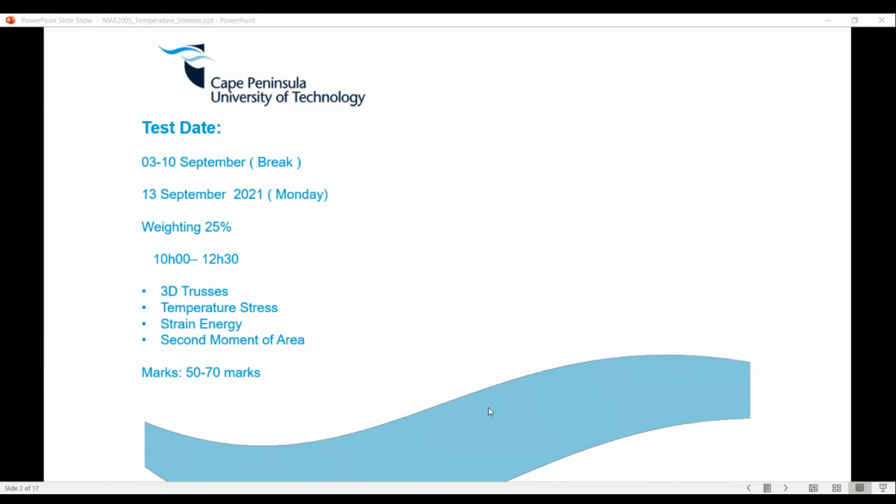But I can assure you, it's a study break, really, because you'll probably be writing electros the next day, and then thermals on the Friday.

So once I conduct all those lectures, I'll consolidate that into a small timetable so that you guys have the dates. The chapters we're covering are for the first four chapters we covered this term: 3D trusses, temperature stresses, which we'll be doing today, strain energy, and second moment of area.

Okay, is there any questions on this so far? Just so that everyone is aware of this.

Yes, Alex. So you're saying we have probably like a week break or something before we... Yep, that's correct. Will we be able to ask you questions during that week break? Yeah, for sure. It's a bit rough for me nowadays because I have like four subjects, man, so I'm probably spending that time setting up the exams. But yeah, you can ask when you can, just that.

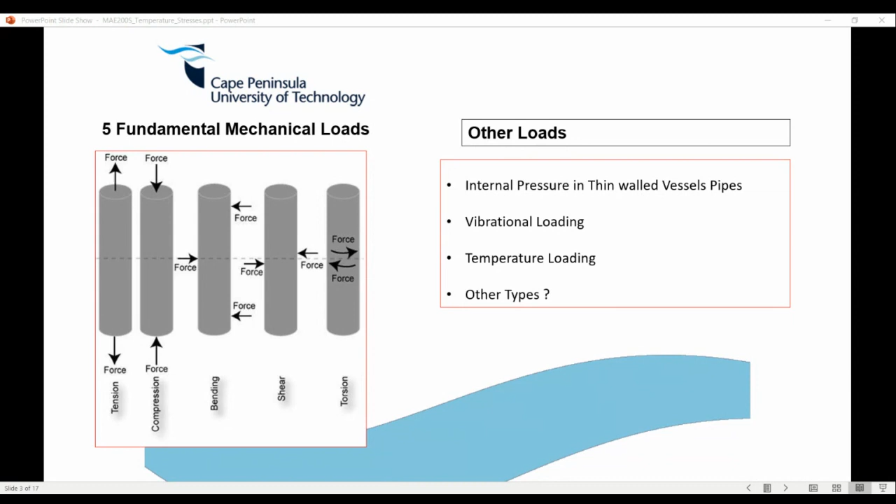So this is what we're kind of looking at. When temperature changes, there's additional stress being induced. It's not a lot - maybe we can tell a quantifying percentage, but we'll see. I'll see how I can play around with it.

Okay, just a formal definition. You're not really expected to know this, but it's always kind of important to note.

Thermal stress may be considered a stress which developed as a result of a non-uniform temperature distribution within the body. Key word, non-uniform, right? If it's uniform, the material has time to adjust, it's not sudden. If it's non-uniform, it's too big, and it can quickly break or rupture.

Examples of this would be parts of an engine, furnaces, metal cutting machines, rolling mills, plastic molding, extrusion, air compressors, hydraulic and pneumatic devices. So that's obviously where we have non-uniform temperature.

So this is now kind of important. As the metal is heated, and this is the notation we will be using, if you heat the metal, it's going to expand, so there's an increase, plus, in elongation.

If it's not restricted, right? So that's also key, that NB there, it's key. Just remember, as we heat it, it will expand if it's not restricted. The dimensions will grow, but then no stress will develop in the material, right?

However, if we have to restrict it, and we're obviously touching on this in the next subsequent slide, if you restrict that, that's when stresses are induced within the material. So keep that small statement in your head throughout the lectures now.

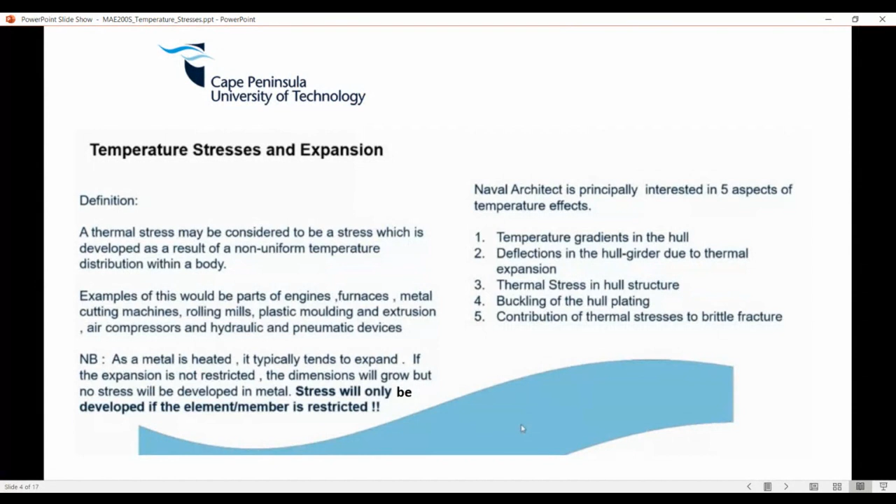Of course, this is more than you need. You guys don't really design structures, but be aware, right? Funny enough it doesn't even talk about temperature stresses because it's a bit small, but of course temperature stresses coupled with fatigue is a whole other game there.

So we're talking about stresses, and this and that. Here we have a new property of materials, it's called the temperature coefficient of materials.

I myself haven't done an experiment on these expansions, so I'm taking the word for it that they are correct. Different materials change dimension at different rates when subjected to temperature changes. Most materials expand with increasing temperature, some even contract, but some virtually stay the same size.

So the coefficient of thermal expansion governs the thermal deformation, or elongation in our case, and thermal stress experienced by a material. This is an important parameter we'll be using, it's denoted alpha. It's the property of the material that indicates the amount of unit change in dimension per unit change in temperature, right?

Lowercase letter alpha, yes. Units aren't a big deal, it's just 1 over degrees Celsius, to the power -1. Am I missing something? But yeah, units aren't really important, you never really touch on the units anyway.

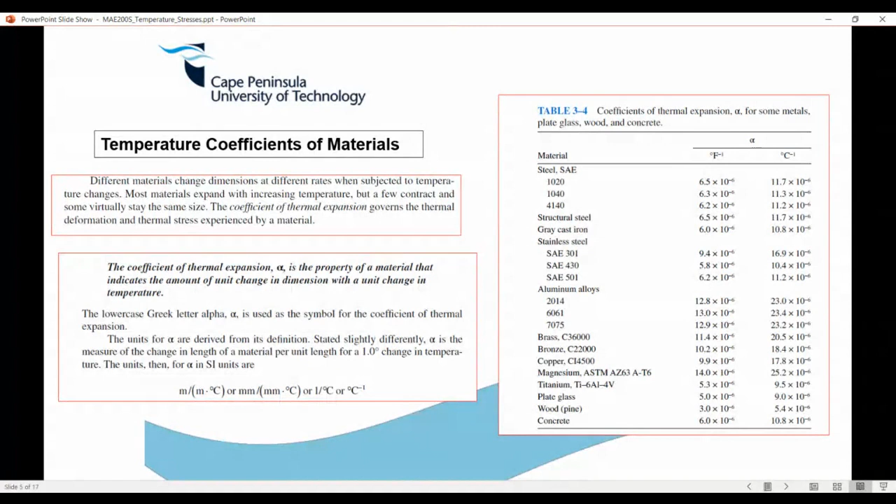If you look at your non-ferrous counterparts, which is aluminium, brass, bronze, copper, magnesium, they typically have higher thermal expansion coefficients than your ferrous metals. Obviously that's probably due to material science, the way the atoms are bonded, and the microstructure. And we look at plate glass, we have around 9. As you can see, compared to steel, wood is around 5.4, concrete 10.8.

Yeah, just a few of them. It's not that you expected to know. I'll tell you why I'm showing all of this.

If you look at some plastics, they obviously have very high coefficients of thermal expansion, reaching magnitudes of around 90 or 95.4 in this table.

And then you get to composites. It's the only thing I find limiting within the current diploma, that we only focus on steels. We can do all the same analysis for other materials, like composites, plastics, and of course biomaterials. We only use steel because it's really the main material we use, steel and all its sub-families, that we do the analysis for.

If you look at the one on your right for composites, composites are anisotropic, meaning the properties differ in different directions. Looking longitudinally, they have a negative thermal coefficient of expansion, like with the aramid epoxy. But if you look at it in the other direction, it behaves completely differently, which is quite interesting.

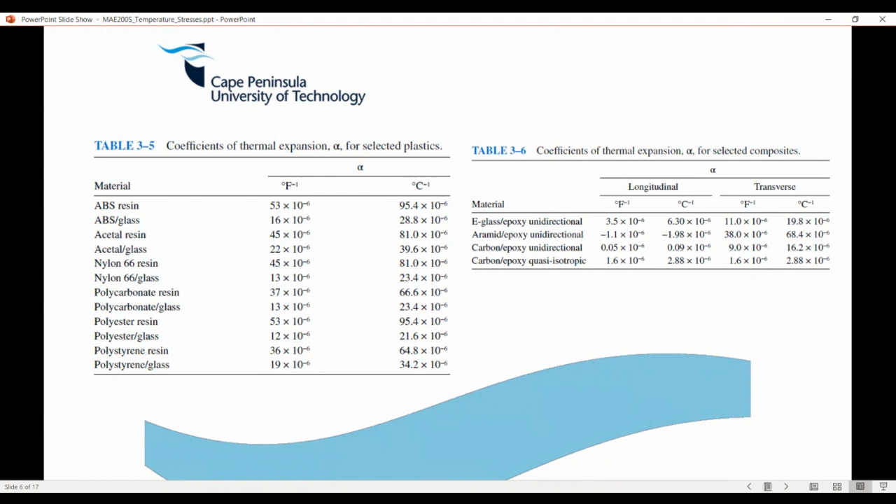Different materials will behave differently, and it's obviously due to the material science below that, the microstructure, the way the atoms are arranged, etc. So let's get into the nuts and bolts.

Back to that note, right? The main important thing to note: if the ends are rigidly fixed, then the change in length due to change in temperature is equal to the change in length due to stress induced in the material. What does that all mean?

The first thing you want to imagine, case A: we've got some bar fixed to something, who knows why, it is what it is. Maybe someone just welded it there. At the original temperature, there's no stress induced, obviously, so we have 25 degrees ambient, nothing's happening.

Let's say the engine starts up and the engine room temperature heats up to 40 degrees. So we're going from 25 to 40. It's not a big gradient, but it's a gradient nevertheless.

So case B is free expansion, meaning we're just allowing the thing to expand. What is it expanding by? Why don't I have the formulas over here? I don't have the basic models which I also wanted to include, just give me a second, I'm having a look here. Yeah, I didn't actually include the models, I thought I had them over here.

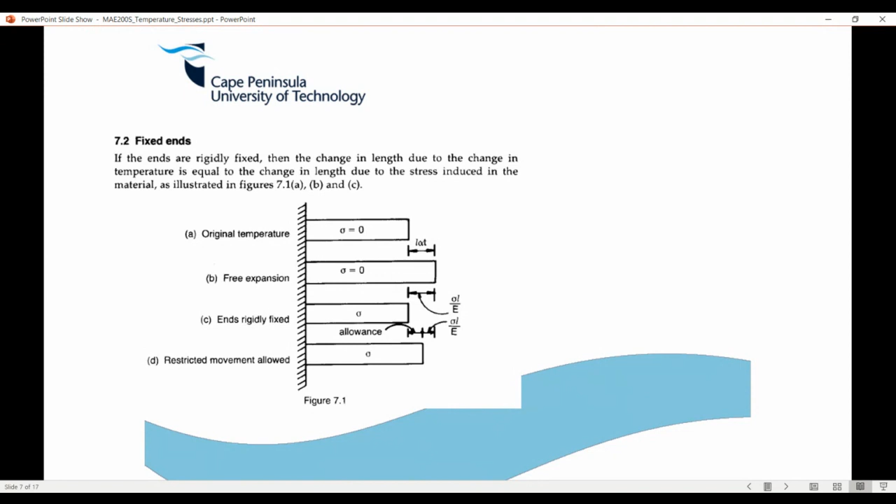Now let's say Alex decides he's going to end up fixing this, having two ends fixed, so think of it as a fixed cantilever. Just want to set up my tablet here to show you what I'm talking about.

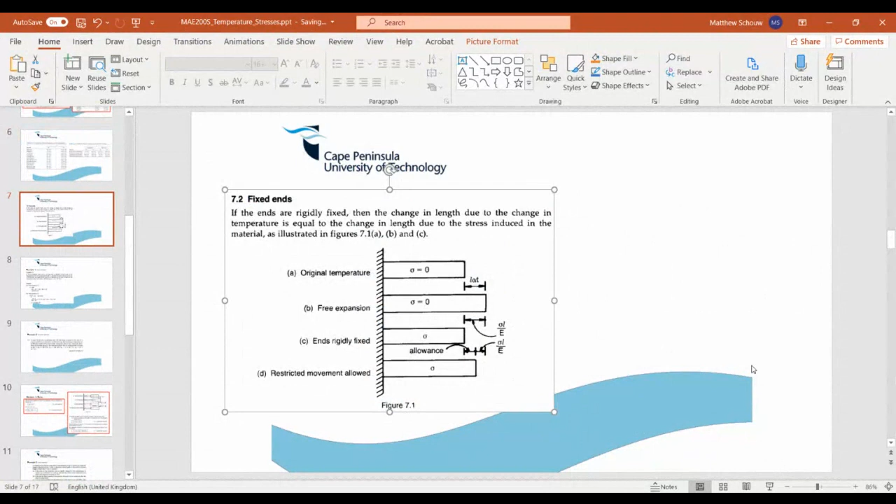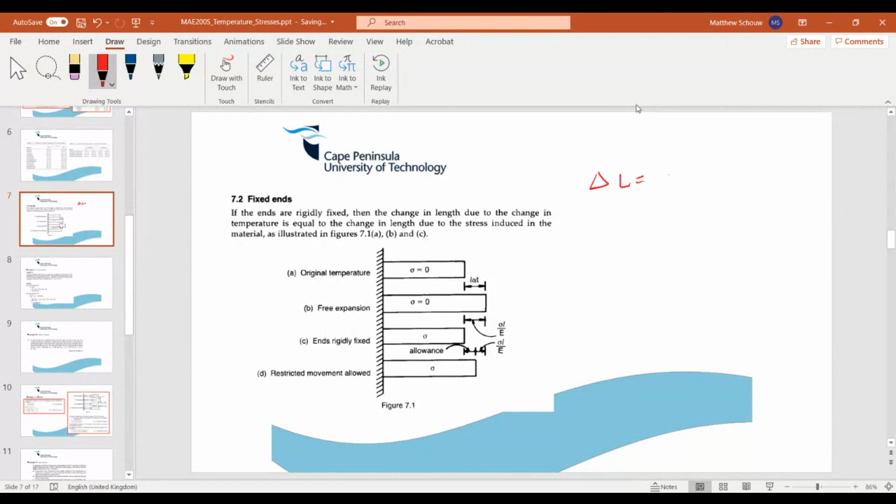I just can't believe I didn't have the model. The model I was referring to is that the change in length we can determine using this formula: alpha L T. If there's an increase or decrease in temperature, that's the formula you use. Your alpha is the coefficient of thermal expansion, L is the length, T is the temperature. Bear with me on that model.

So what I mean is, at the original temperature nothing happens, we're at 25 degrees; in the engine room it's 40 degrees. But now let's say we decide to fix both ends. When I say fixed, we're putting it between two supports like this, like a bolted beam when cast. So if we now increase the temperature from 25 to 40 degrees, there's some kind of gradient, let's say a non-uniform gradient.

This material is going to push against this thing, and of course the wall is going to react. Therefore, a stress is now induced to the magnitude of, essentially, a mechanical stress, sigma L over E.

Okay, so that's for C. I hope everyone gets this. We'll talk about it now. And then on D...

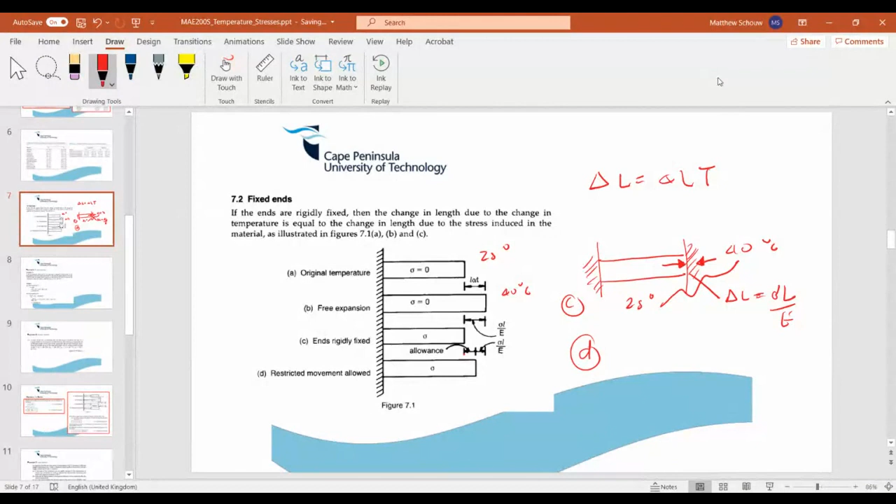Just bear with me. So there's a restricted movement. If we have a bit of an allowance, let's have a look at this - essentially allowance means there's a bit of play in between the thing. So let's look here, ends are fixed. We've got some space for it to extend or elongate, and we're going to have to account for the allowance.

Now I just want to show you, let me copy the models here because it's really bothering me. I'm not sure why this formula is not here. Where are you... here we go.

Yeah, got it. Here we go. Okay, so cut. I'm just going to get it on the slide here. It's essentially what I'm explaining, but I'll just recopy so that it's on here. Not sure why it's not.

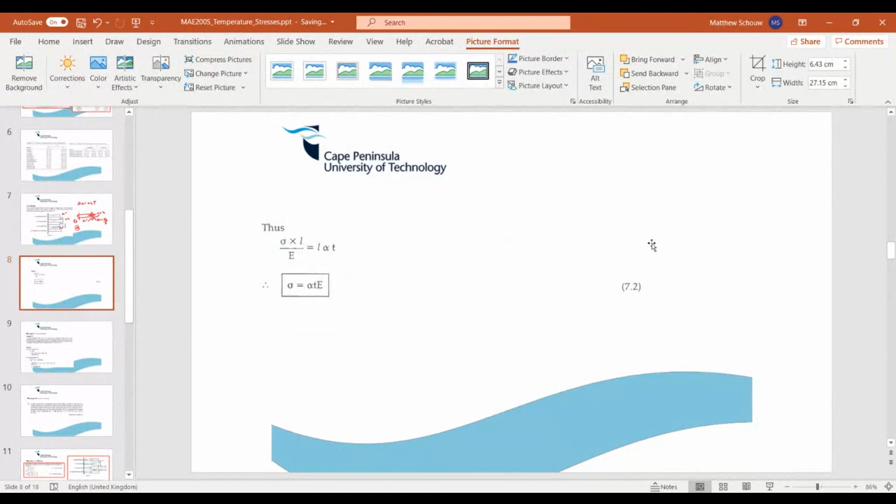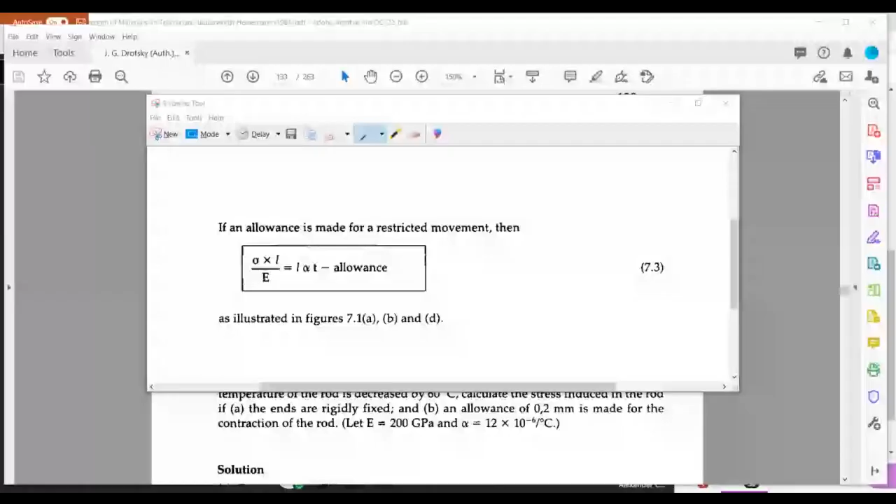So that case, this is the case where it's fixed, right? That's where it's fixed. And lastly, that's if an allowance is made for restricted movement, right? Okay, so that's the two cases which I was highlighting just now shortly.

So if it's fixed, there's going to be a stress induced. And of course, even when you have a bit of an allowance, what we're going to have to do is exactly the same, but we subtract the allowance. So before I move on, is everyone clear when the stress is induced? In this context, of course.

Students, are we all there? Yeah. Okay. Thank you, thanks Sasha. Anyone else?

I hope you understand the idea, because I can make a scenario where the thing extends, but let's say it doesn't extend all the way, and there might not be any stress induced. So just be aware. But anyway, let's have a look.

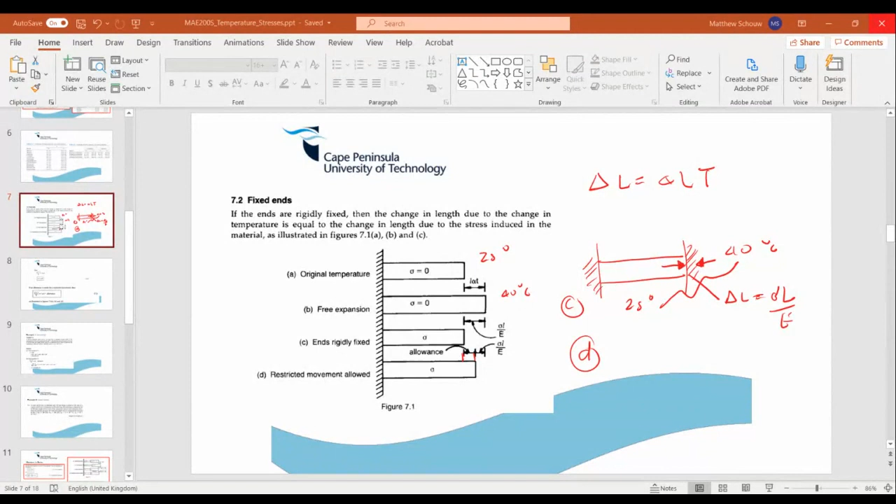So okay, we just have a quick example we're going to touch on here, and then I'm going to give you one practice one. Obviously I want to see if you guys are all there, if you have enough time to cover everything here. So first thing is first.

Yeah, so let me do the example. So, 25, it's your first example from the textbook. I just remember I'm going to play around on this one anyway. A 25mm diameter steel rod.

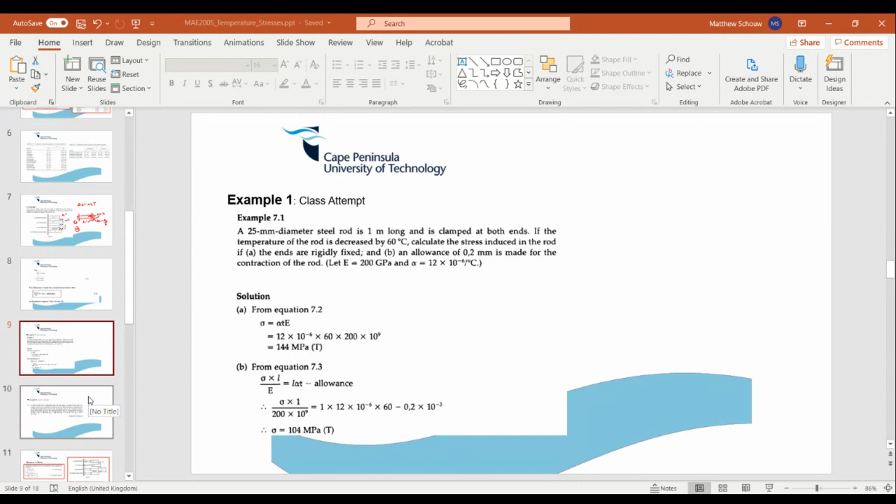Right, so you've got a rod. Let me just create a small rod for you here. Where are your rod? Yeah, it looks like a rod to me. There we go. Steel. Yeah, it's steel now, okay.

It's 1 meter long and it's clamped on both ends. Right, so there we go, so it's fixed. So did it tell you what's going to happen? Right, so this could have been a shaft for crying out loud - maybe some bearing supports or whatever.

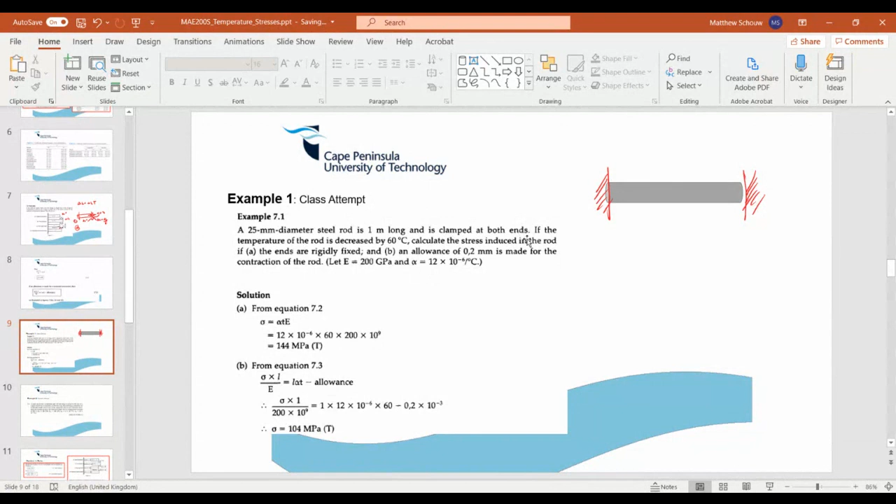And now the temperature is decreased by 60 degrees. Right, so they're telling you, I guess, the gradient here already. Calculate the stress induced if the ends were rigidly fixed.

Okay, so we know change of length - I guess I'm going to call it the mechanical change of length. What did we call it last time? It was mechanical, according to what I called the mechanical change of length, and the thermal.

Stress equals your coefficient of expansion - I'm just going with a T and an E. So if it's fixed, that's what's going to happen in this case example. So if you compute that, it's 12 times 60 times 200, which is your elastic modulus, it's always going to be there, and then 144 tensile.

Why is it tensile? Because it's a reduction in temperature, a reduction. Are we on the same page here?

So if the temperature is reducing, shouldn't it contract? The ends are rigidly fixed, so you're having a tensile force.

Yeah, there we go. Does everyone get that? I'm just checking. Yeah. Okay, yes, no one is going to... so, so I don't get that.

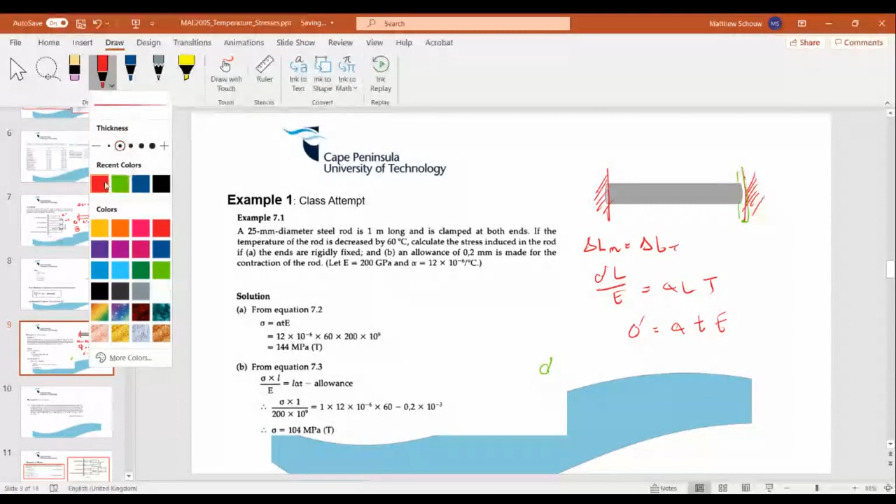Well, we have to use this. Let me just get that right. Stress L over E equals

it's the same, I guess. Basically, it's alpha LT. And of course, because it's a bit of space, it's not the same, so we have to subtract this allowance. I'll just call it A, because there's a bit of room there now. So we're basically essentially moving that. That's just speaking to this figure over here.

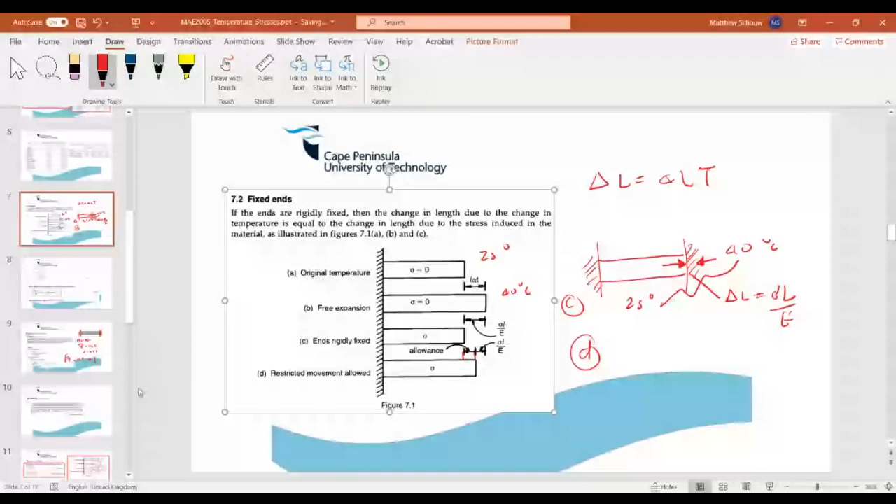The senses are important, we know, and we're going to get to that now, because that's what trips everyone up. So that's just looking at it from a formula-based approach, but we will start touching on and seeing why this is happening.

Okay, so what I want you guys to do now is try and do example 2, which is 7.4 in the textbook. It's basically a steel rod joined to a copper rod. Now this is a series arrangement. I just want to see, as I did this last year, if you guys are able to figure this out.

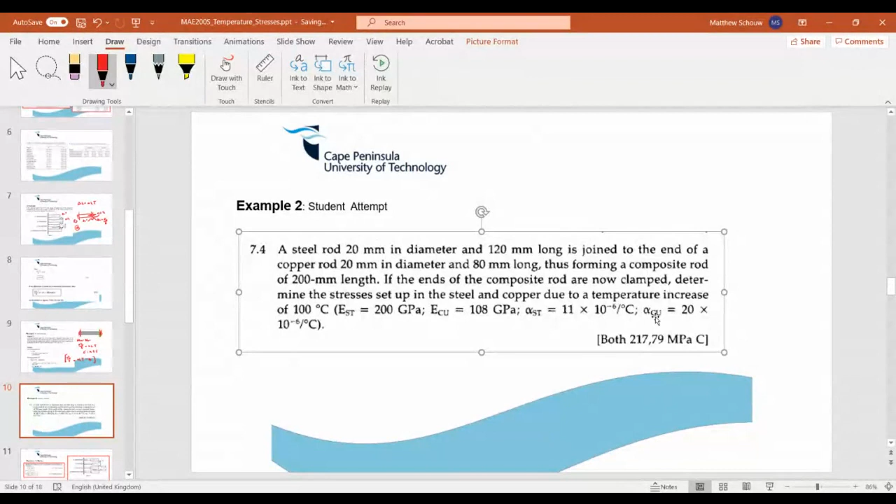So now we have an increasing temperature. What's important is we're really going to start to see the senses playing around with each other. So try and do this one, and then we'll touch on it. I'll solve this one, and then we're going to move on to actual series.

So I'll give you guys around 10 minutes, that should be enough. If you want to get some hints, it's just like I said, a series arrangement. But I'd like to see if you do understand the senses, because that's where I essentially want to get to.

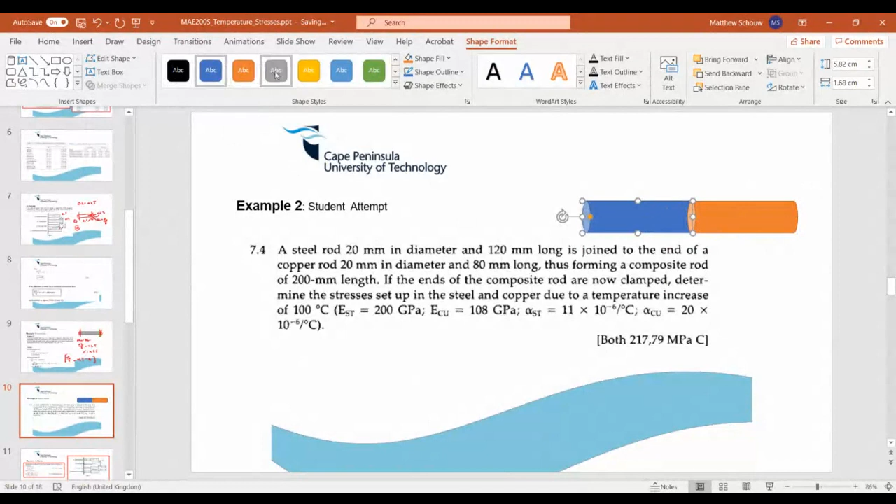Yeah, you've got two shapes, so you've got two rods here. Just see what you can do, right? In this case now, this will give me - obviously just assume that they're both fixed. One is copper, one is steel, I think, and they're both fixed, right?

Now it's going to be very interesting to see, because one is going to be fixed, or one's going to extend faster than the other one. So I want to see exactly if you guys can pick it up.

Okay guys, so around half past we can actually just get back to this problem. So try and do this one. What's important is look at the senses. I want to see if you guys can pick up the senses within this.

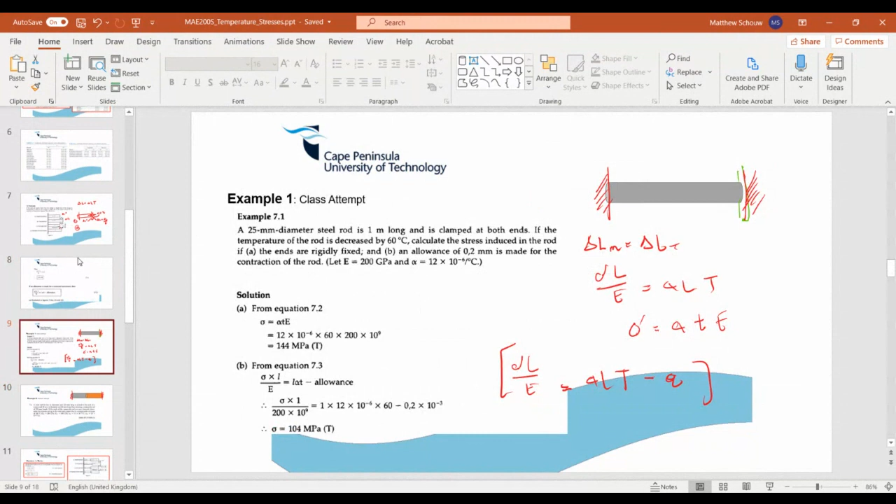Sorry sir, can you just go back to where the formulas were? Yeah, do you have a textbook? Not just yet. Yeah, because these formulas are not gonna particularly help you with this problem, and that's the thing. Those are the formulas, but yeah, someone's gonna have to take a picture of the formulas for you.

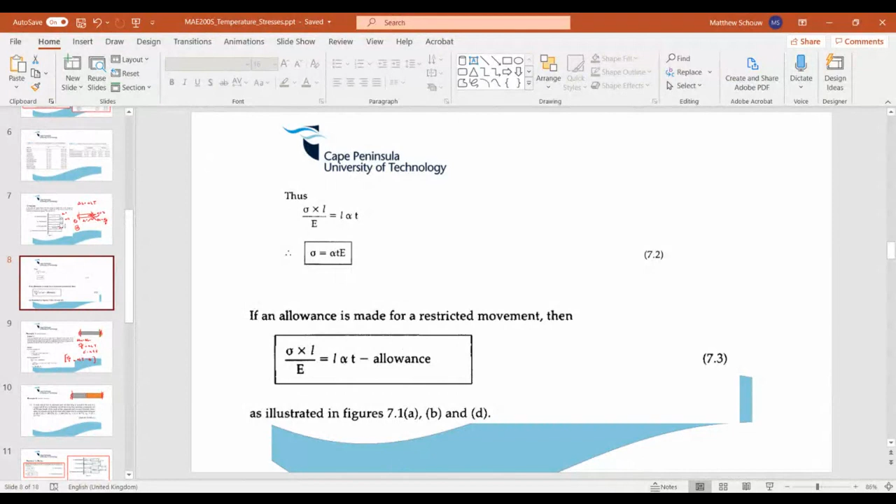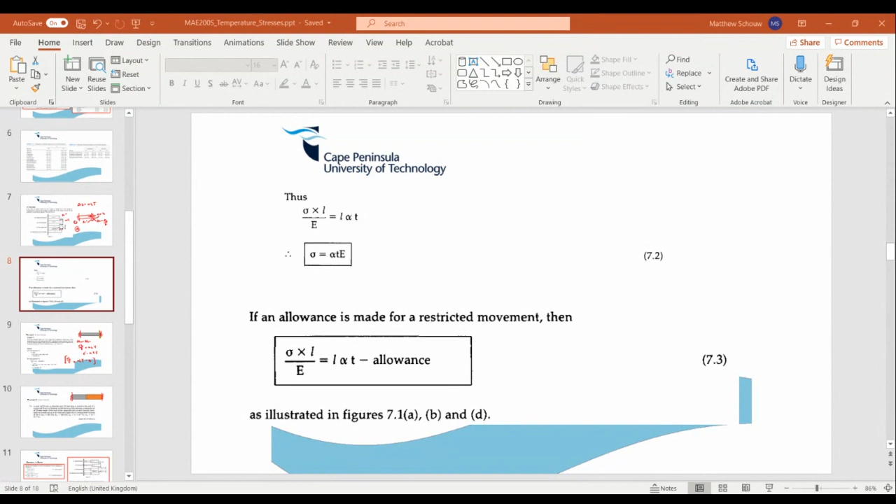Where was I now? There's 2 bars now, so I want to see if you're able to kind of interpret exactly what's gonna happen. Do you have the formulas down there? What example are we doing now? 7.4. Is it done? Are you done? Yes, thank you, okay cool.

So is there a tensile stress in steel and a compressive stress in copper? Now you're talking. It says they're both compression there. But now you're talking.

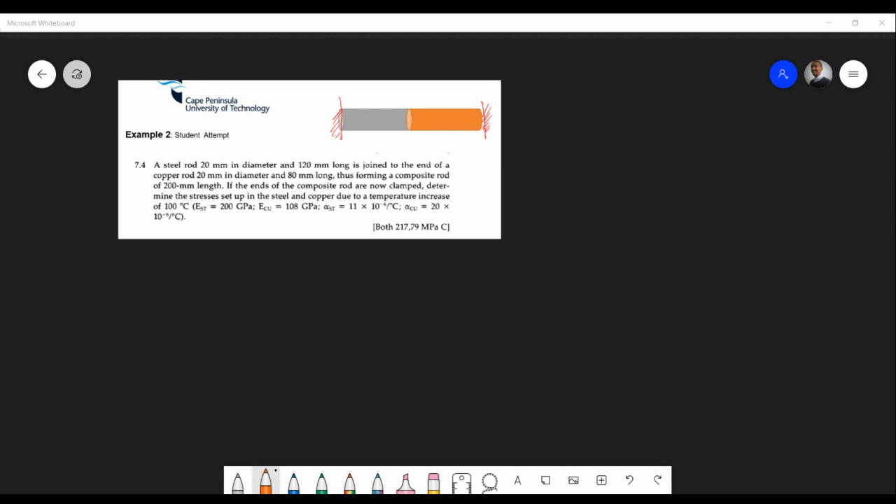All right, where are we here? Where's my whiteboard? Okay, so first thing is first, right? Because it's a series arrangement, I think what I was trying to really pick up here before the senses is that both these materials are going to expand, all right.

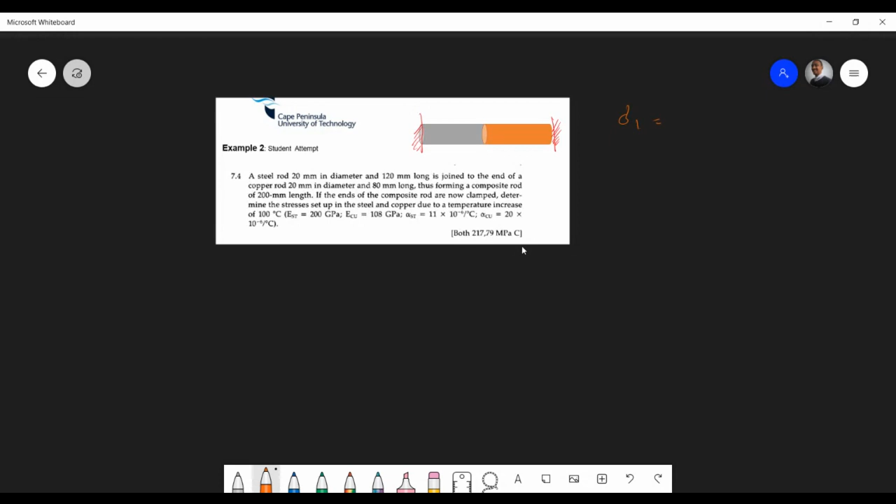So the standard model of our series arrangement looks like this. Let me just get this right here. The forces are the same, right? So the force in the first one is the same as the second one, and therefore we can do this kind of setup over here. Stress 2, right? So this is what I was trying to show.

Then of course, because it's in series, they all have individual changes in length. I think that's what's important here. And then of course L1 plus L2 - this is something you're familiar with. Obviously this is kind of not what you're used to, but in the temperature stress context, this is the way you want to view this. And this total change in length is due to thermal expansion, so you should be aware of that.

So just following the way Sasha did it here - well, I think we all did it the same way, can do it the same way. We have to work out the total change in length of this arrangement here, right?

So steel was 120 long, this was 80 long. Diameter here was 20, and the copper rod was also about 20 diameter here. Yeah, okay, cool, the same area. Yeah, forgot about that, okay cool.

So it's alpha L T steel plus alpha L T copper, so that should get you the total. Steel was normally - well, this is 11 in this case, not 12. Length, what is our length? It's of the individual one, so that's 120.

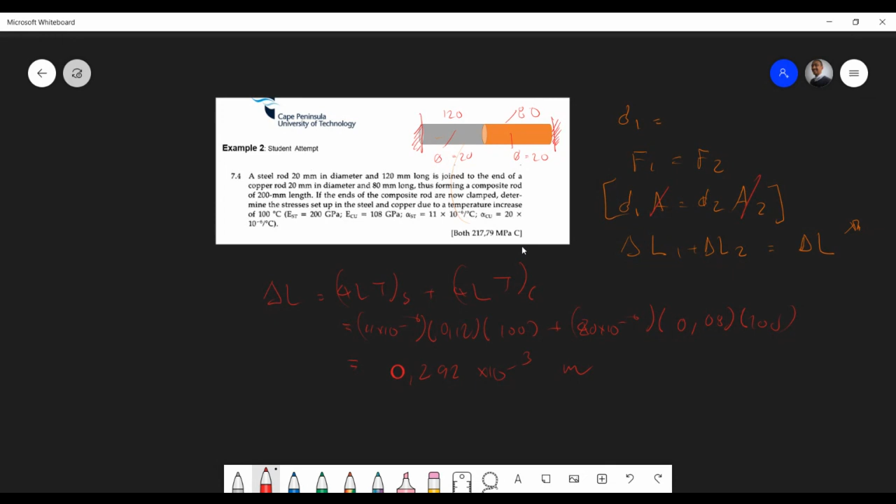Right, so once we're done with that, now remember the areas are the same, therefore the stress is the same, and this is why they're going to have the same... they both can have the same. Obviously the stress of different things could have changed, but it's the same sense and same magnitude of stress. So what we can do now is - where are we now? We have the total change in length here, right? And of course that's going to be here now, so that's 0.292.

And this is a very special case, students, just to make you aware. So stress L over E steel - I'll repopulate this again - stress L over E copper. Okay, so these values are the same, right? So that's how whatever we get.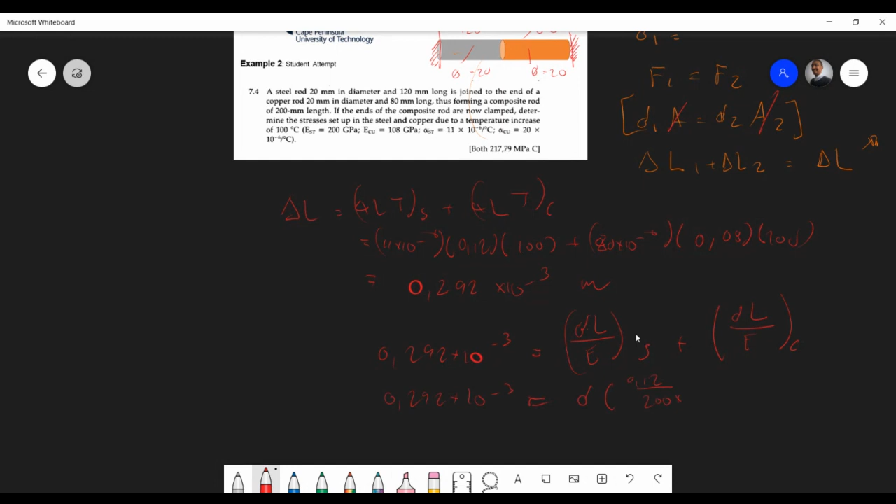But I'm going to talk about the sense. So because these are the same, obviously we can just say 0.292. Let me just sort it out. I'm taking stress - that stress is a common factor. Length was 0.12 divided by 200, plus what's this guy again? Length 0.08 divided by 100. I think 108.

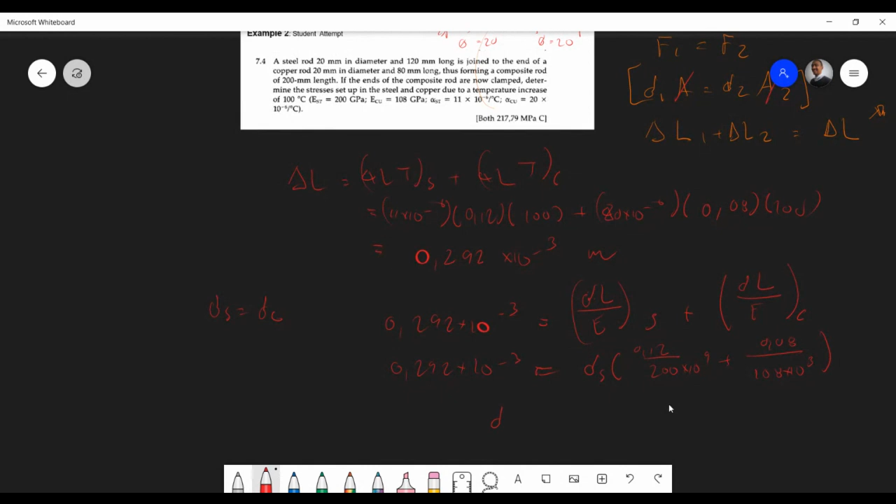Okay, this is what I want to touch on now. Where are we - stress, does it really matter? Let's just call it stress of steel, right? But stress of steel is equal to stress of copper. Okay, so what is that magnitude? Oh, it's obvious the answer there, right? Students, are we all happy with this? Do we all have a feel for what's happening?

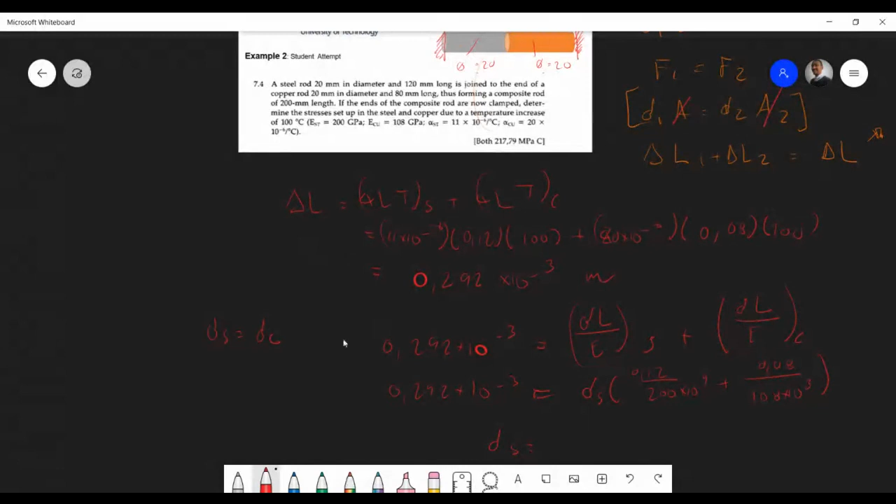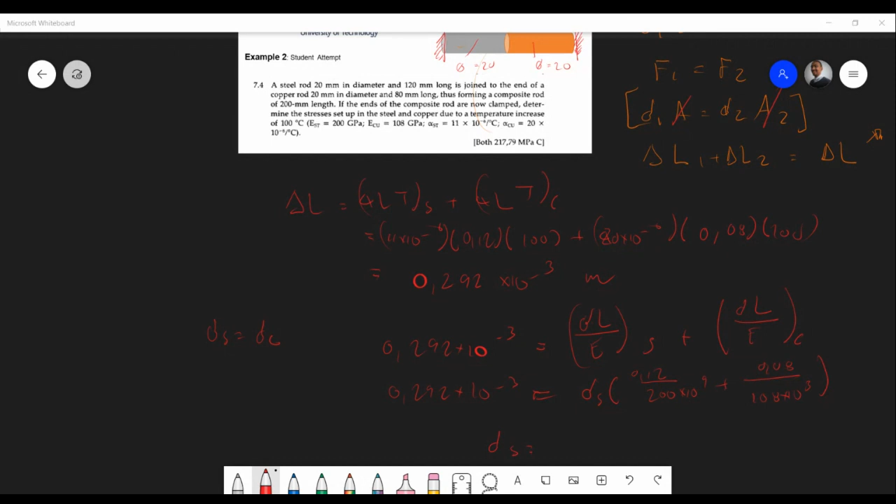Okay, that's going to be, I think, 217. Do you guys get the exact? So now the problem is the sense, either positive or negative. Now the thing is, if I'm getting a positive value, I'm assuming this is tensile. This is what's getting to me. I would say steel is tensile, and what is this - copper is compressive. That would be my train of thought. Because...

Can you please make the pen color a bit thicker? Okay, yeah, let me change the pen color. Sorry man, I've just... it's not conducive.

Yeah, it's cool, I hope you can see this here. Okay, I'll just move on to the next example. But my argument here is that...

As the copper is extending, right? It's being compressed here, right? That's pushing, that's inducing a compressive stress.

Whereas this, if you're looking at your... let me just get Sasha to go over his thoughts on why this is both compressive. To me, that's what that looks like. They are both compressive because they are both expanding.

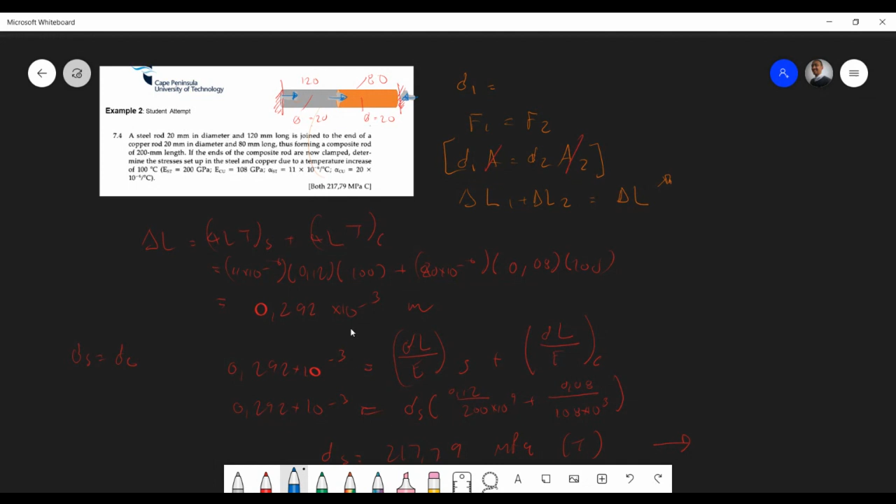So if you have to think of them individually, and if you took into account that one side was not rigidly fixed, so if they were free to expand, you'd have an increase in the change of length due to an increase in temperature of the copper, and you'd have an increase in the change in length due to the steel. But they were fixed, so you have to take both expansions into account.

If you were to include an external tensile force, let's say one side was rigidly fixed, but on the other side there was a tensile force being pulled, then you could find that one was in tension and one was in compression. But because the ends are rigidly fixed and there's no external forces, they are both in compression.

Ah, I see. So are you saying they're both extending, and the walls are basically just squeezing them? Is it cool if I say it like that? Yeah, the walls are keeping them in place.

The only thing that is going to change will be the interface, where the original interface is. That interface will then shift to a new location, depending on the modulus of elasticity of the materials. But they're both in compression.

The stress and the force induced are two different things. Yeah, that's correct, because you can think of it in terms of a change in length, or you can think of it as if there wasn't a change in length, but the same effect would cause the change in length due to a force.

Okay, let's see, I like the way you mentioned that there. How do you know if it's tensile? That's what we're trying to figure out here. Okay, so let's try another example. Let's see here.

I've touched on this last year already, but anyway, let's see. I know, Miso, you asked me that question. Oh man, what's going on here? Okay, just give me a second here.

All right, okay, let's...

Check another example here. To help understand it, you can actually think of it in a thermodynamic principle as well. So taking our industry into account, if you have a boiler and a steam line, and you isolate the steam line, then the temperature drops due to condensation, and you pull a vacuum, which will be a tensile stress on manhole covers and flanges. So the reduction in temperature will cause a contraction, which will induce tensile stress.

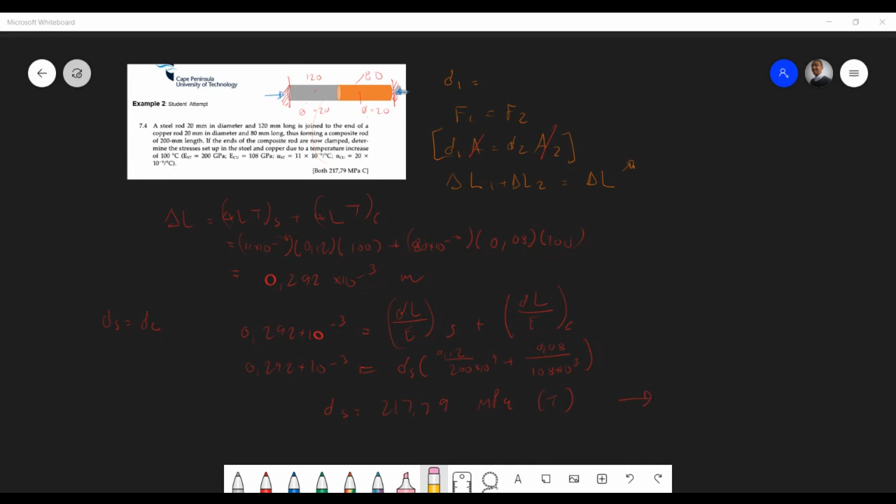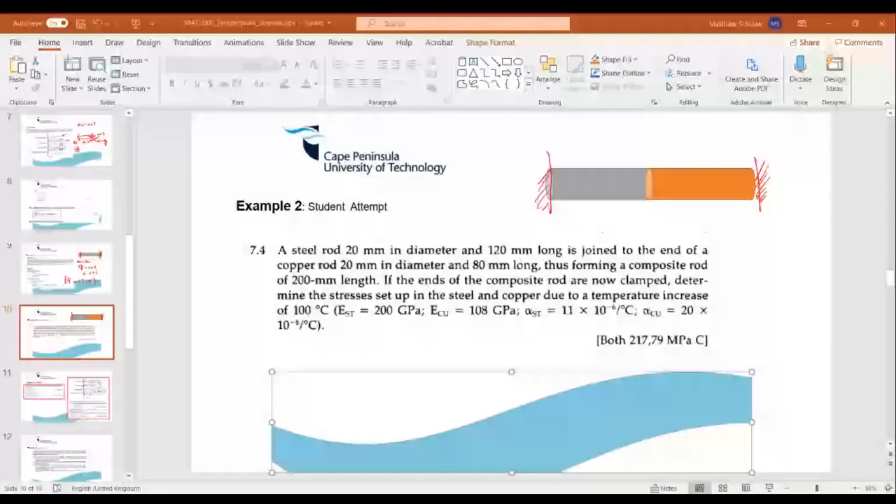Okay, so because you just touched on series, now let's just move along. Yeah, so we just did that now, right? So what's important to note, looking at your models there, is your statics and compatibility equations. Statics is essentially the force, or the equilibrium equation; compatibility is the change in length. So just looking at the diagram over there, let me just increase this size.

So you've got two members over there, right? If it's at original temperature, once again, we know that there's no stress, leading to free expansion—but of course that means it's not fixed. The length will increase, but there'll be no stress induced. However, if we fix it now, there'll be stresses induced due to it being fixed, right?

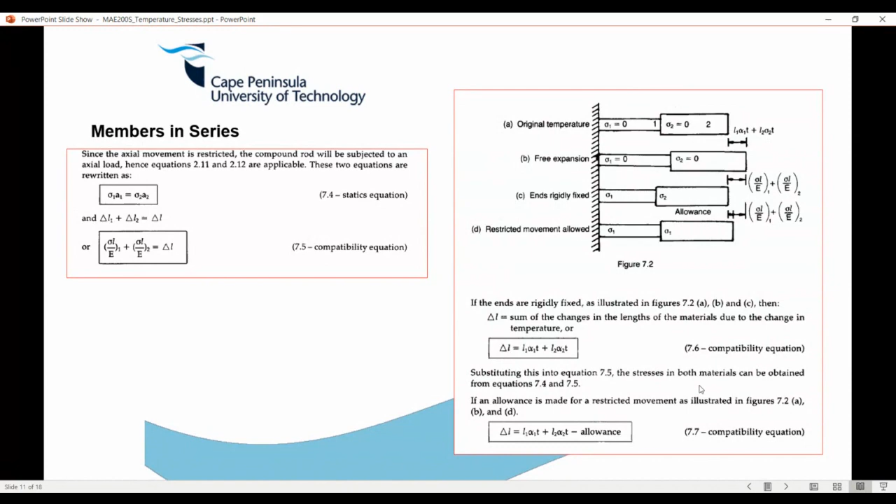So now the question is whether it's going to be tensile or compressive. So now I want to make a note. Sash, you can just repeat the thing we talked about, force and stress—I actually want to write it down here.

Yeah, so it depends if you're in parallel or series. If you're in series, generally your force should be an equal force exerted on both members at the same time—that's correct. And if you're in parallel, I always equate it to the change in length being the same, because you can have a force, but your force is not going to be equal on all the different members, but your change in length has to be.

No, that's fixed, I'm not talking about that. I'm talking about the sense, not the members in series. Like what you said about force and stress being two different things - you can get thermal expansion contracting, but there's thermal stress and thermal expansion.

So what about the basics, sensors? If you take the basics of strength of materials, your stress is equal to force over area, right? So your stress times the area is equal to a force. And you can then, if you were to have a change in length on a single substance or structure...

That change in length can either be due to temperature, or you can also have that change in length due to a force. That change in length will be the same. So you can equate it in terms of force, or you can equate it in terms of temperature - it's up to you.

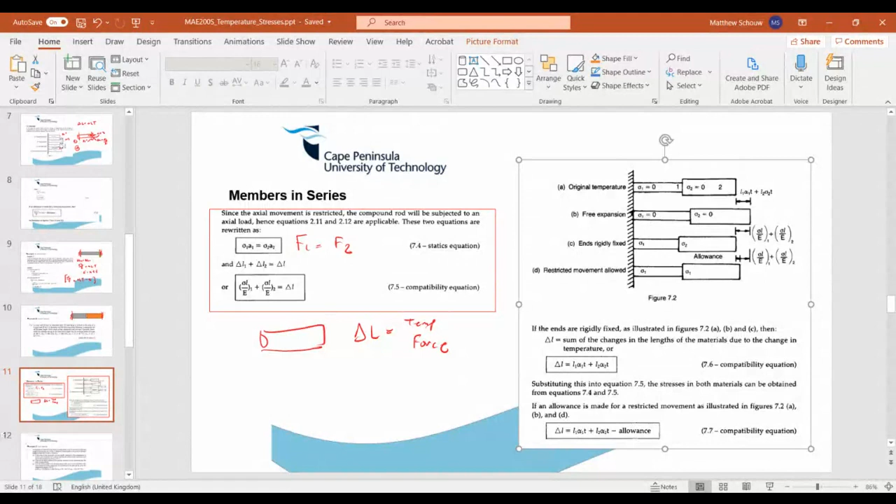This is an example in the textbook. I'm going to solve through this one, and then I think I have another one here. Let me just quickly check. Yeah, okay, let me quickly share this.

This is where we're going to have a discussion with our sensors, which is obviously of critical importance, because you're going to have to be able to compute the resultant stresses, and that's really what I'm looking for in this particular chapter. Where am I now? Let me just...

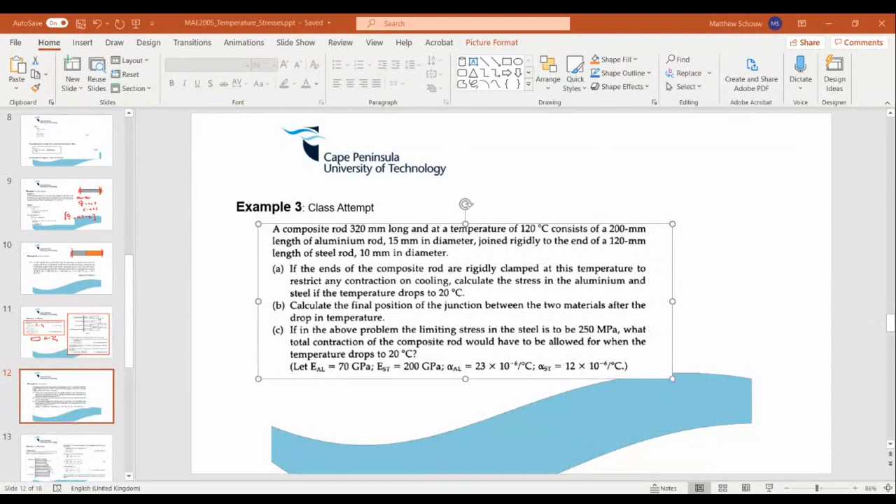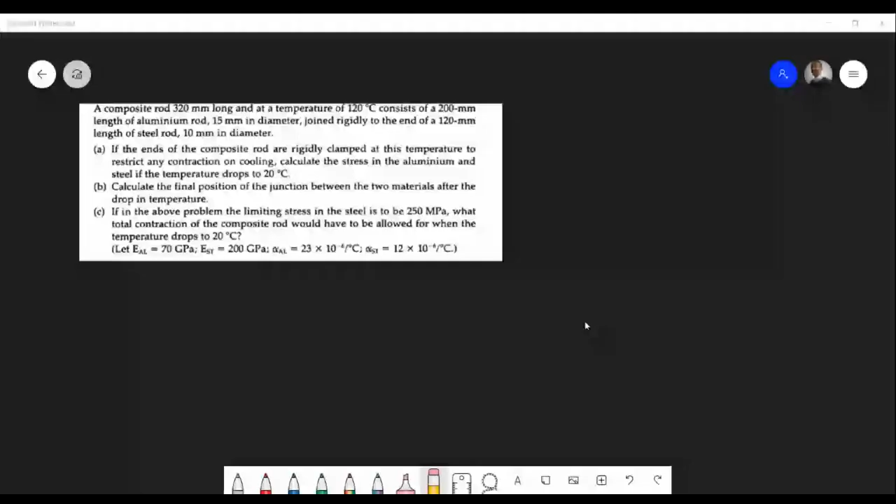Oh shit. The whiteboard. Okay, I'm quite pleased, a lot of guys have worked their head here, so that's fantastic. Okay let me just quickly check - oh man, I'm sitting with problems here. Okay guys, just give me another minute here.

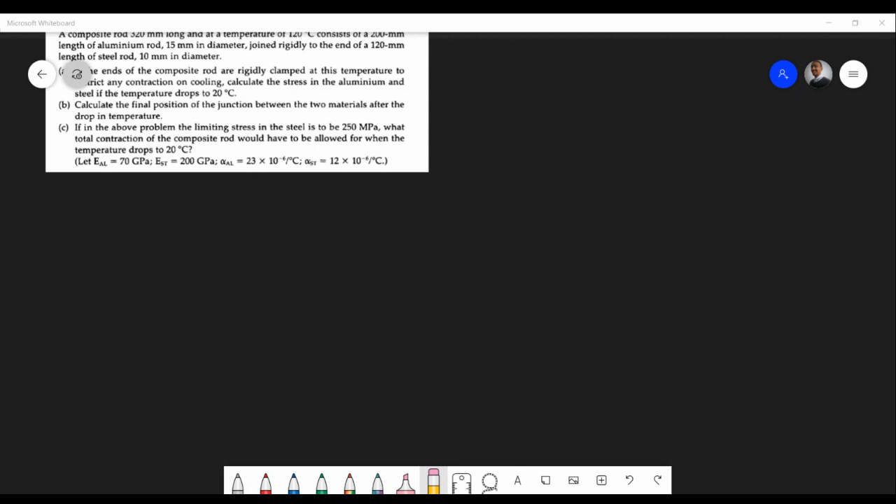All right, okay, I'm back. Let's see, okay, just zoom into the question here.

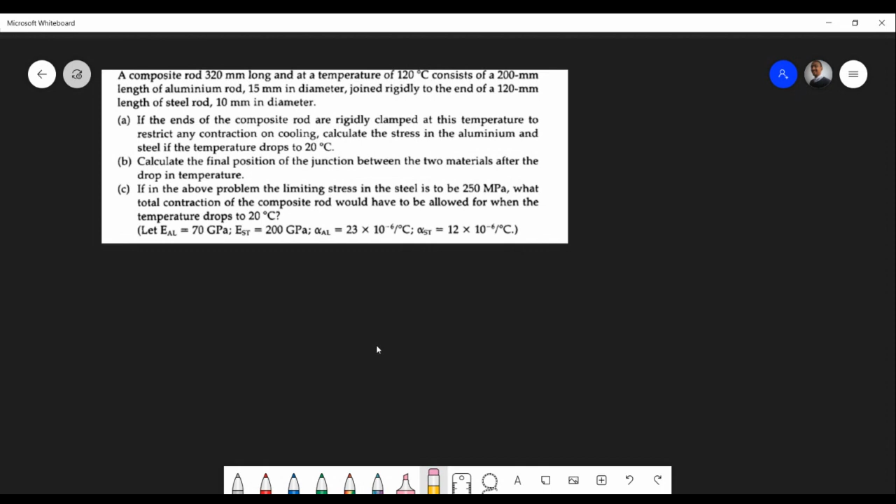So a composite rod 320 long at a temperature of 120 degrees consists of 200 millimeters length of aluminium, 15 millimeters in diameter, which is rigidly joined to an end of 120 length of steel rod, 10 millimeters diameter. So this becomes a bit interesting - we have two different rods over here.

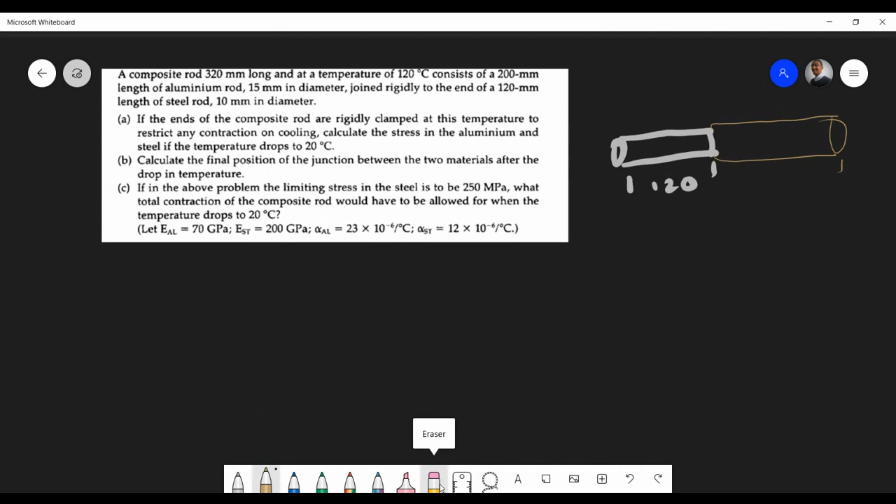So it's a similar setup over here. I'm just going to get these diameters down because the span is a bit too thick. Aluminium - oh, it's aluminium and steel, not copper, forgive me. So this is going to be steel at 10, and aluminium is 15 millimeters.

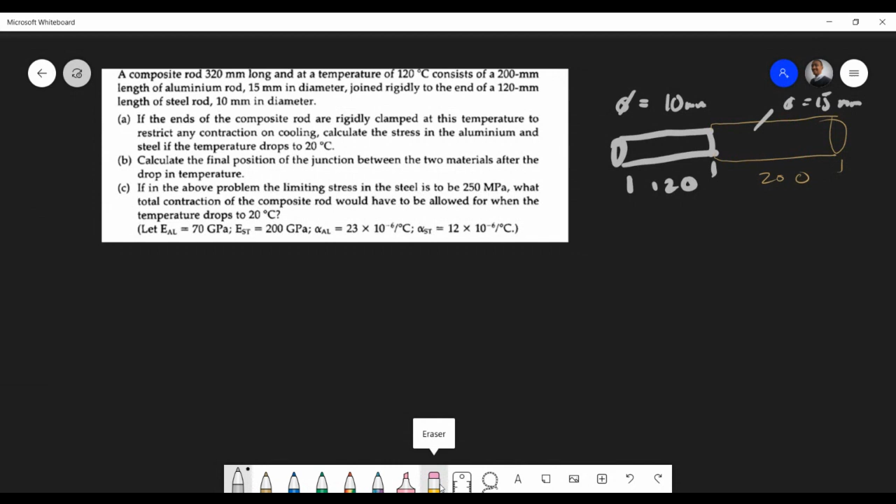So in this case, check what happens now. If the ends of the composite are rigidly clamped at this temperature to restrict any contraction on cooling, calculate the stress in the aluminium and steel if the temperature drops to 20. So check, now we're contracting, right? So what are we expecting to happen? This is what I want to talk about. Obviously this is not the same thing.

So we are contracting now, right? First thing, what are we expecting here? There's a drop in temperature, so things are not extending, they're contracting. So I'd like to know what stress will be induced in the aluminium. This is the steel, and this is the aluminium. So this is what I want to talk about.

Before we actually tackle the problem, what are we expecting to happen? So it's contracting now, right? If this is contracting, that means this is going this way. And on the aluminium side, what's happening over here? Just forgive my drawing here, I really wanted to have them both thin. Let me just make one thinner than the other.

Mr. Demanus, what do you have to say? So I'd like to know your thoughts. It's contracting now, so what's happening? It's not expanding, it's contracting. So what I'm concerned with is the force of the stresses induced, because our equation does not give us the senses.

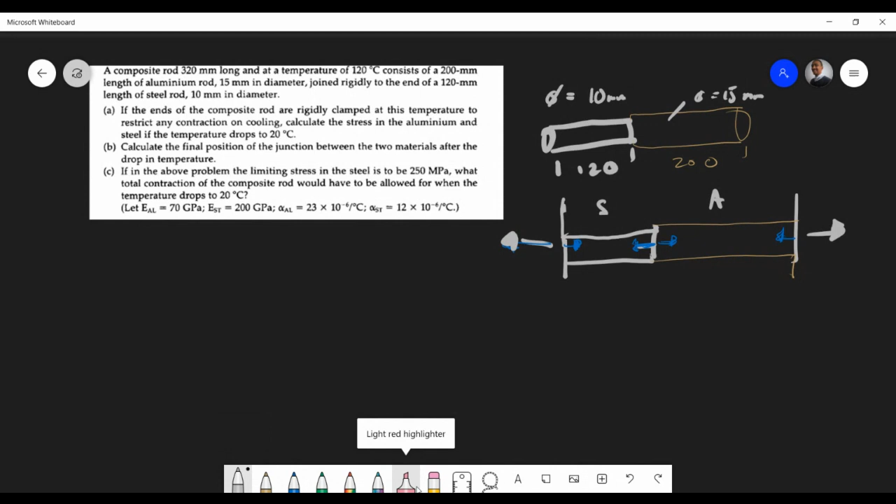The way I always viewed it is the sense of the force, and this is what I liked about what Sasha was saying. I don't know if you meant that, but if you're contracting and just looking based on the wall, that means it's a tensile stress. It's the opposite of what's actually happening. So as you're contracting in this case, the force induces now, and we revisit the old example and make comparisons between the two. If you notice in the previous example, let me just get it right. What was happening? Where are we?

There was an increase in temperature, and that is why it was being compressed. So this is what it's like. Let's have a look, let's follow the same train of thought. The way I normally teach it is I look at the ends of the system, and of course this is in the series arrangement. As it's contracting, I guess there's a tensile force, but you have to look at the whole, obviously the walls now, or the fixed end. That's the force, or the sense of the force. But anyway, first things first, in series we have F1 equals F2, and then we can just do our standard.

I wanted to do something here as well, I think it's going to work out quite nicely. Stress in steel, area of steel - ah, I should have just done this. Stress in aluminium times area of aluminium. I just want to have it like this. Okay, so just forgive me with this here.

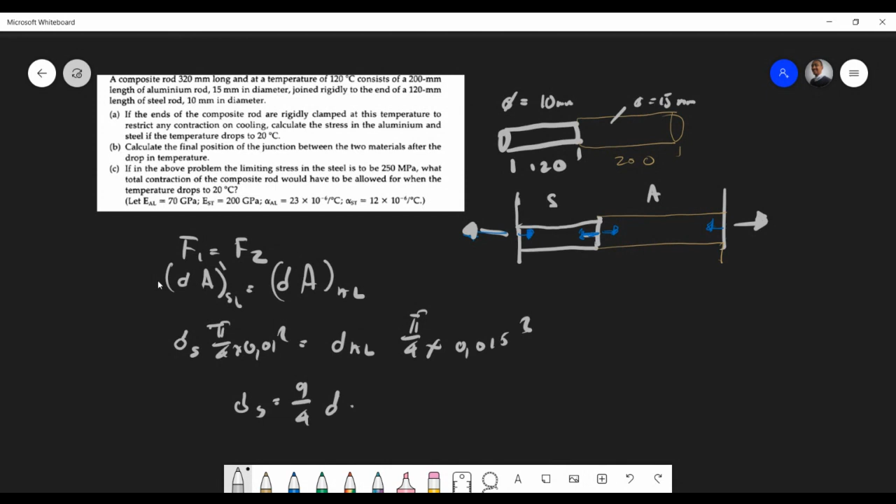Students, are we all happy with this? Do you all understand what's going on over here? Okay, so, yeah, equation number 1. We'll touch on that and we'll break it in, we'll want some time in this example, obviously. Next, obviously, is our compatibility equation with the change in lengths. That's obviously going to be simple, that's where this tensile stress induced here comes in.

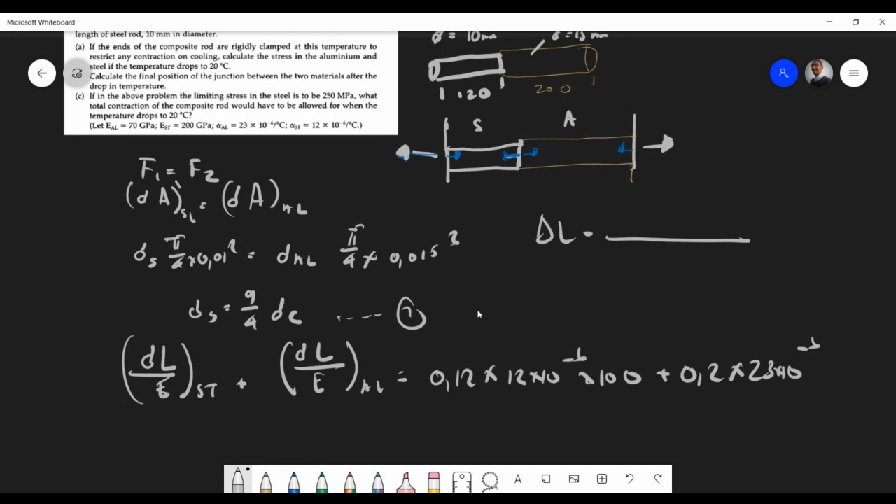So this is steel, this is going to be aluminium. And okay, so of course the total change in length - remember in this case it's due to the thermal expansion, which induced these mechanical extensions or mechanical strains or mechanical change in length. So you've got 0.12, its coefficient of thermal expansion is 12 times 10⁻⁶ times 100 - we've got to take 100 as a common factor. We've got 0.2 here times 23. Yeah, my students.

All right, so once this is done, you should get 0.604 times 10 to negative 3. You guys all concur with this? Now, the other thing I want to do is just find - can I just have this as is - so the length over the modulus, can I have that value? Plus the aluminium as well. I'll show you what I'm going to do. So can I have that? The length over there, length of modulus, length of modulus.

Can we get that quickly? So I think so, for your steel, that's stress steel, right? So in brackets there would be... where did I put it now?

Yeah, I'm gonna do something, I'll show you guys what I like. Oh wait a second, I referred it to aluminium because I got the ratio. So I put the... okay, cool, it's fine, that's fine. Okay, so let me just work it out.

So the length of steel, just confirm with me here. It's 0.12 divided by 200. So it's 625 times 10 to the negative 15. Just confirm that, please, 15 eh? 15, that's what I have to see here.

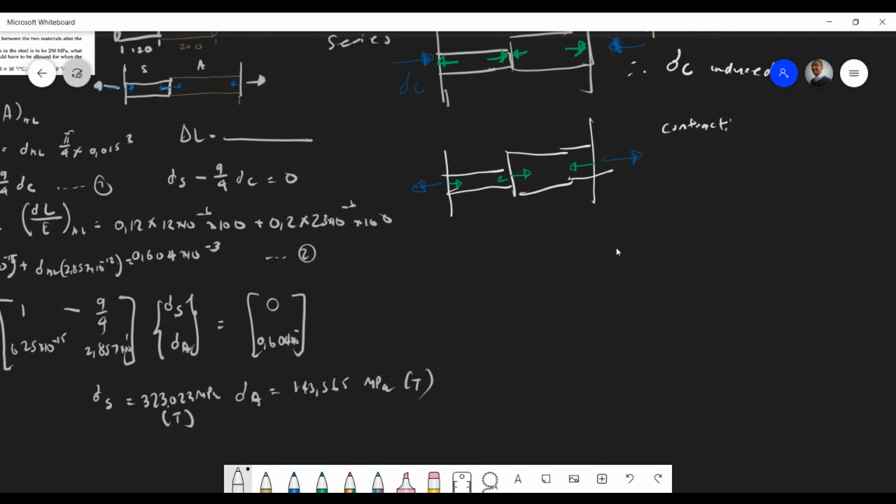And I normally look at the wall, and obviously have to apply the opposite force, and that would be tensile. Misho, did I answer your question? This is for series, guys, right? This is for series, so contraction - tensile stress.

Are you happy? I don't know. You're just saying yes, I don't know if that's new. Kiefer, do you have any? Do you get it, Mr. Pereira?

Yeah, I'm with it, it's not really that confusing, to be honest. Yeah, just that it has happened. Trust me, you'll see, so we just keep it forward in series. Silas, go for it.

So you see, when you are taking the sense, are you looking on the wall or are you looking at the components themselves? The whole sense is the whole. So you're looking at what the component will experience.

I'm gonna create a note on this, guys. This is what is experienced, so let's just say induced. Component experienced, this is, so what can we call this? The context, right? I'll call it the context. So it's the component wall. Okay, that's fine, I think you all get it.

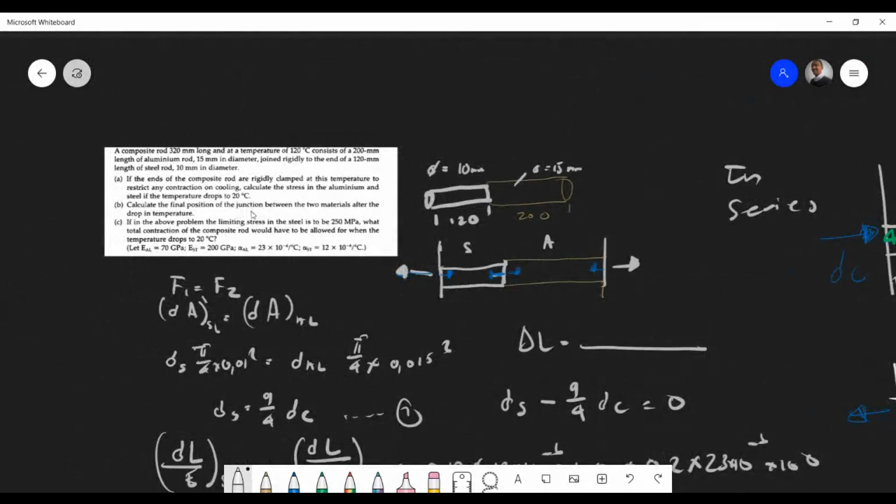I need to make a note on this. Anyway, this is the fun part. And now I have to calculate the final junction position between the two materials after the drop in temperature, right? So let's go to the Dr. Engelbrecht. So what would your approach be?

Because we can put it both ways, by the way. You can either take it into consideration from steel or aluminium. Whichever one you're going to take, then it's a two-step process. So basically, take it as if there were no limiting factors, in other words no wall, and it was just free to expand. Then you'd work out the change in length for free expansion. But then you've got to take into account that there is a tensile force on the system, right?

Because you've already worked out your tensile stress, and then the tensile will obviously be a reduction, right? And then you get another measurement there. So you take your free and your tensile and add them together, and that's going to give you your interface. But take into account that your free expansion is going to be negative because it's contracting, and the tensile force is going to be due to the steel, so that's going to be a positive. So you're going to say minus the tensile, plus the stress of the steel, and then you're going to get your interface change. But you can do it either from steel or from aluminium.

Yeah, so we're gonna do that now, right? So let's go as the book goes, aluminium. That's exactly what I want to hear. So the aluminium, what we're gonna do now, we could have done this for the previous example as well, obviously it was a bit easier. We assume we can contract freely, right? Like due to just this, so I'm just gonna spare you guys.

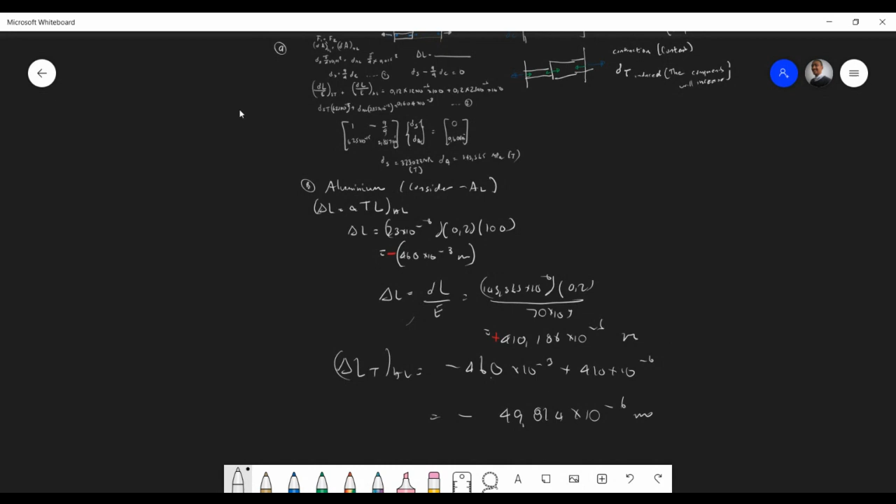49.814. Do you all concur with this answer? Are we happy with it? So what this means is it's contracted by that much. All right, are we happy with this? But we're not done yet. They've requested... yeah, I'm happy.

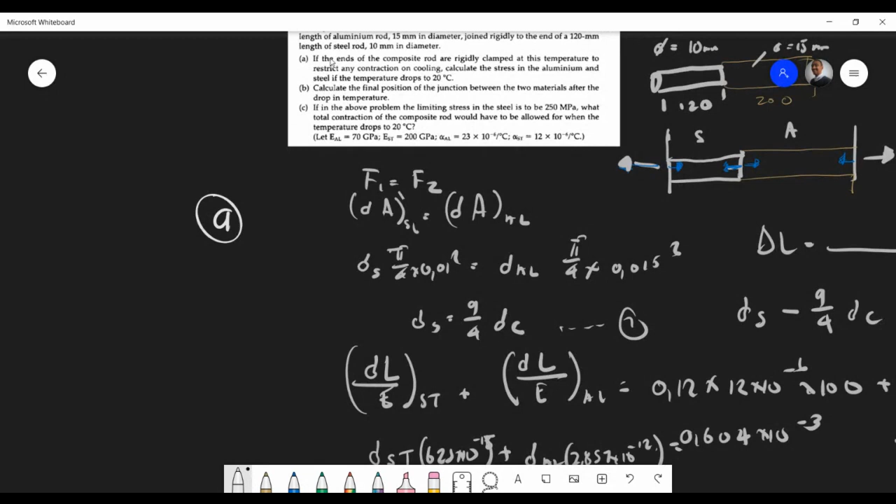I just made it that there were positive values, but if there's a temperature decrease, you minus the 2 values, and if there's a temperature increase, you add the 2 values. Increase, no, it's the same, right? I'm just doing it that way. It's perfectly fine, yeah. So the final junction, that means basically we have to account for the initial length.

Yeah, we're gonna have to kind of close this off. So it'll be the total length, it'll just be the 200 minus that, yeah. So it's 200, or 0.2 rather, that'll be the final junction. 0.2 minus 49.814 times 10 to the negative 6, and it'll be 199.95 millimeters from the aluminium end, right?

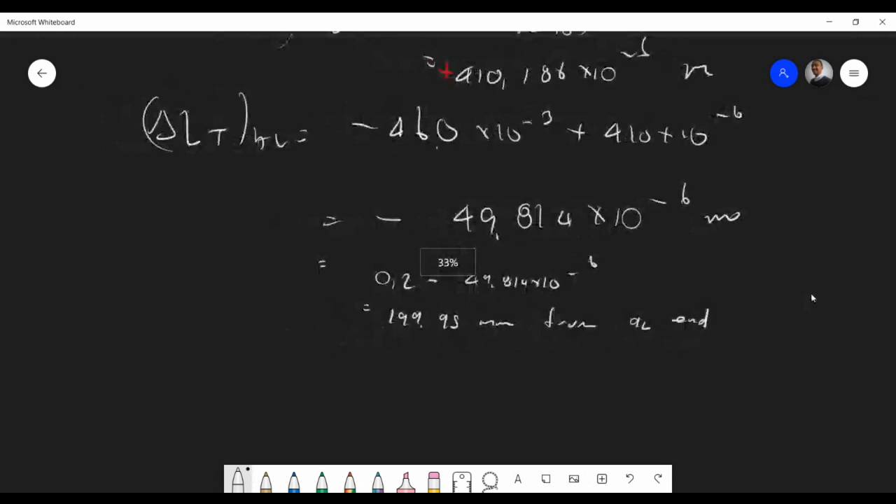Okay, so what we're going to do now, we're going to do for steel, and we expect to get exactly the same answers, right? So let's draw a line here, and you just quickly confirm.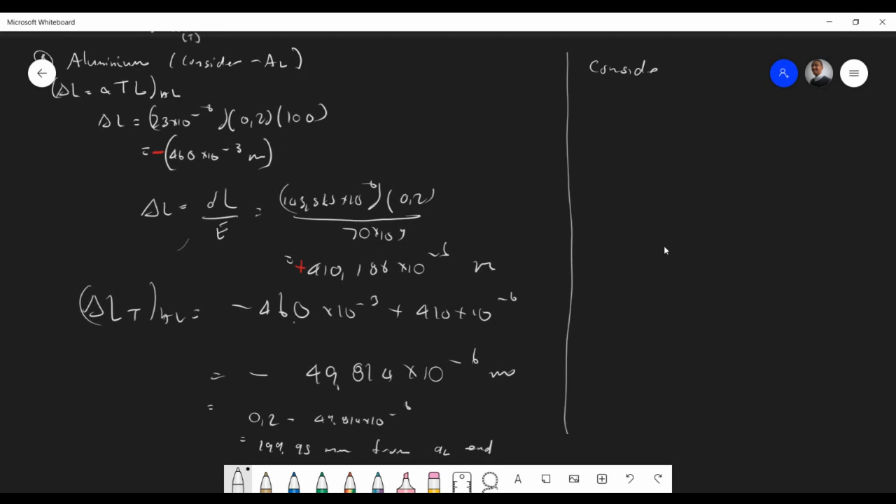If you have time to check, this is what to check. So once again, we're considering steel, but we're allowed to expand freely, so to say, or contract freely. And what is my length for steel? 0.12

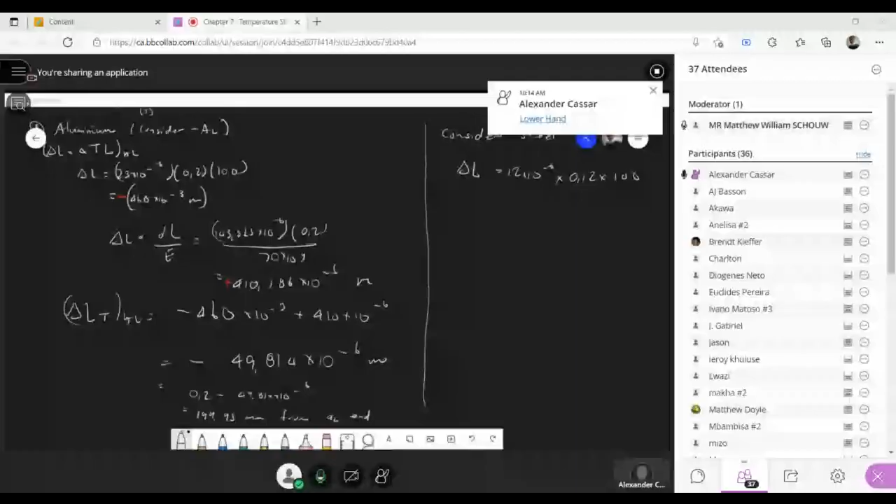at 100 degrees. Yep. So is that 49.814 a gap between the aluminium and the steel? Can you just repeat that again? That 49.814 times 10 to the minus 6. Is that a gap between the aluminium and the steel? Yes.

Arguably so. I thought they were like welded together or something, literally fixed together to make one composite rod. I didn't think they were just two individual pieces. Yes, not a gap, but like... let me find the words here. The composite rod is a single rod of two different components, so they're fixed together, it's not a gap between them. So on the original rod, they gave you the dimensions of each rod, and obviously due to both rods being of dissimilar metals with different modulus of elasticities, the change in length for each one will be different, but they're still joined together. That distance you were talking about is where the original distance has shifted to. Yeah, that's good enough, so it's not like there's a gap. It's a mistake what I said there.

Okay, but anyway, let's just do for steel here. Steel is contracting, we're allowed to go. So what's my change in length of thermal expansion there? Can we just get that value? I get 144, right? And of course, we know this is contracting as well.

I'm just checking my lengths here. This one length was 120. Yeah, it's 120, and the other one was 200. Okay, just making sure. Okay, once we're done with that, we can do the...

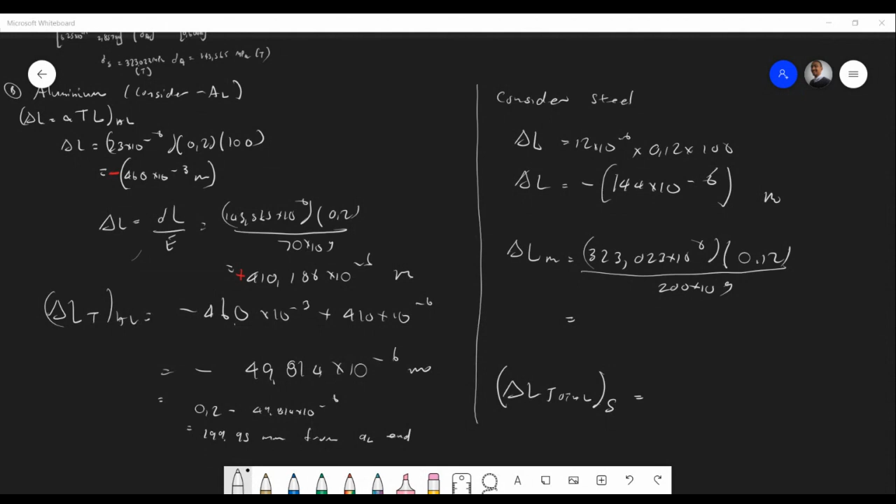Mr. Mart? 193.81 times 10 to the minus 6.

Thank you, Mr. Cassar. We can do the same kind of thing. Of course, you can do it like Mr. Cassar, just subtract the end, or you can do it this way. Obviously we know it's contracting here. Is it -6? Plus 193, that's tensile, so this becomes positive, times 10 to -6. What's this one? It's -144 plus 193.81. Then we should get the exact same answer.

No, of course, it's negative. Students, are you okay with this? If you ever get a series problem, you shouldn't have a problem at all.

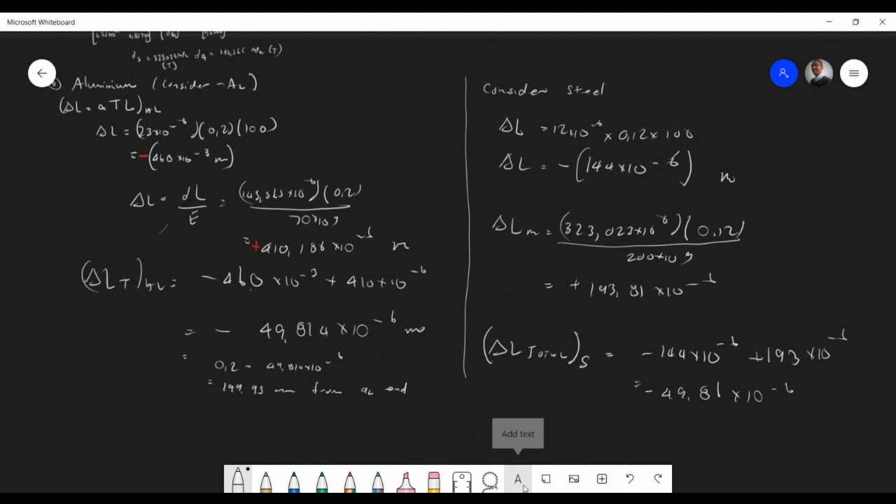Then I think just recapping on the new position here. Let's see. Oh yeah, then of course, if you do it from this end, we can actually work out the length as well. So is there any questions finding the change in length in both materials?

I think people are all... Yes, Alex. I wouldn't have a question really of the change in length, but I just have one question, just considering last semester when you were doing, what's the name, yield stress.

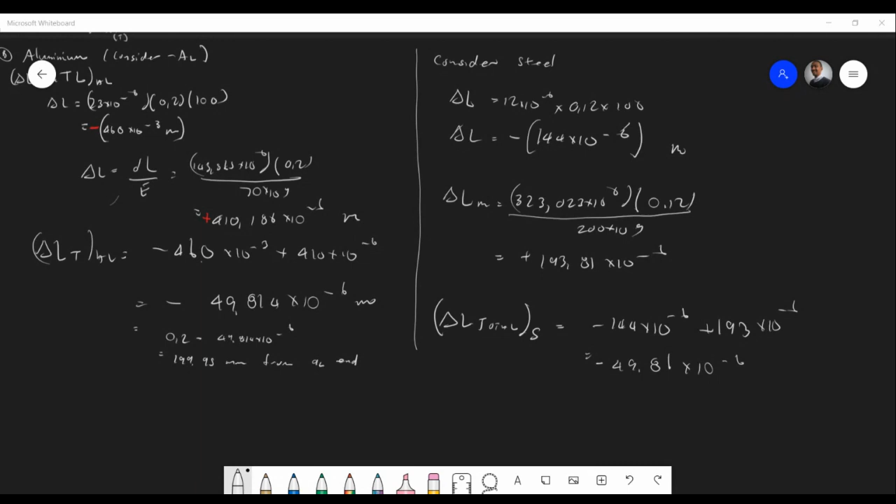What happens if the temperature is raised to the point where the induced stress is greater than your yield stress? There we go. Those are things I want to touch on in the other bulk example. Yes, it'll fail. It's all within the same laws.

So if we're considering, for instance, let me quickly throw this up. A classical question I might ask is, assuming, obviously in this question, they have not given us any allowable stresses. So I'm just going off the cuff here, let me go back to, I don't have a table here.

Normally if I give an allowable stress, so I'll say assume the steel has a... so obviously we're at 100 degrees here. So if I say this is now going to be, the steel has an allowable stress of 355. That's a standard S355 steel, and aluminium doesn't particularly have a yield, but we can call it 300.

Right, and if we push up the temperature, in this case, what do we push it up to? Yeah, to maybe like 150 degrees. And obviously, if this exceeds that value, then the component will break.

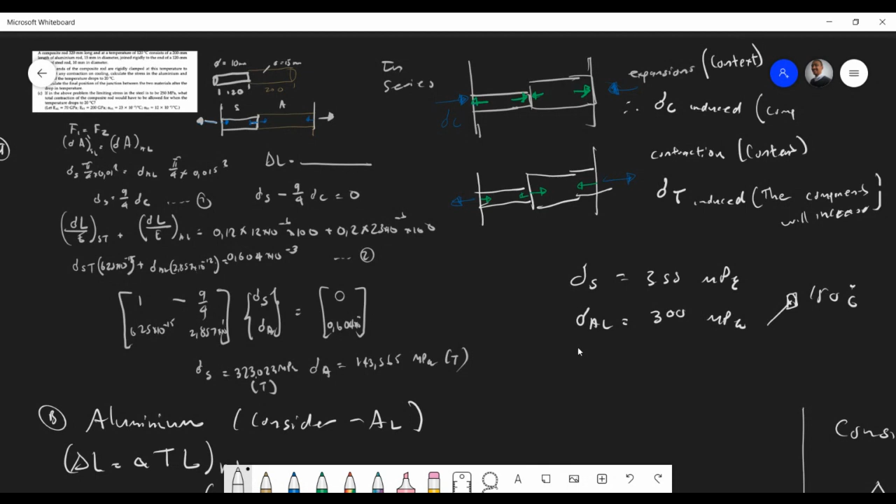So, definitely, yeah, we will touch on something like that. But is everyone happy with this? Because we will take a break and then we'll start on parallel.

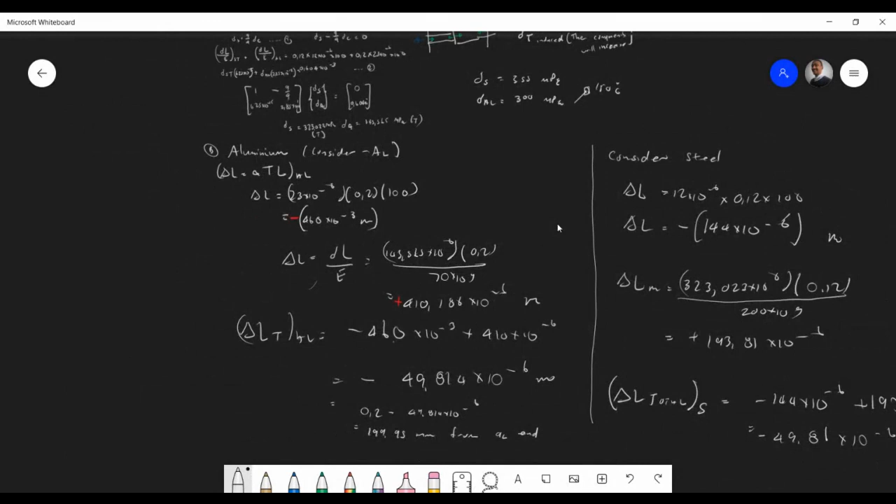Then you basically at the end there. Is there any questions, students? Any questions, people? Please don't sit there and not ask a question. This is the time. I guess it's Monday.

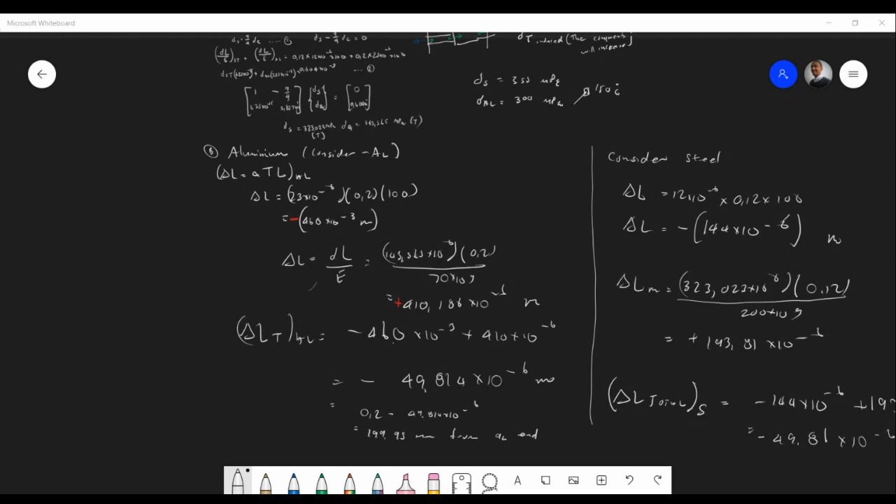Yeah, Sasha, go for it. That funky maths you were doing at one point, can you explain that? The maths, the matrices. Yeah, the matrices. I don't know how to do that. Okay, cool. No, that's fine. I'm happy that you asked that question.

So, since last semester, I was encouraging a lot of my students. Always when you're sitting with a simultaneous equation, or two equations, two unknowns, you're aware of that. So what I try to encourage is to use matrices to actually solve that.

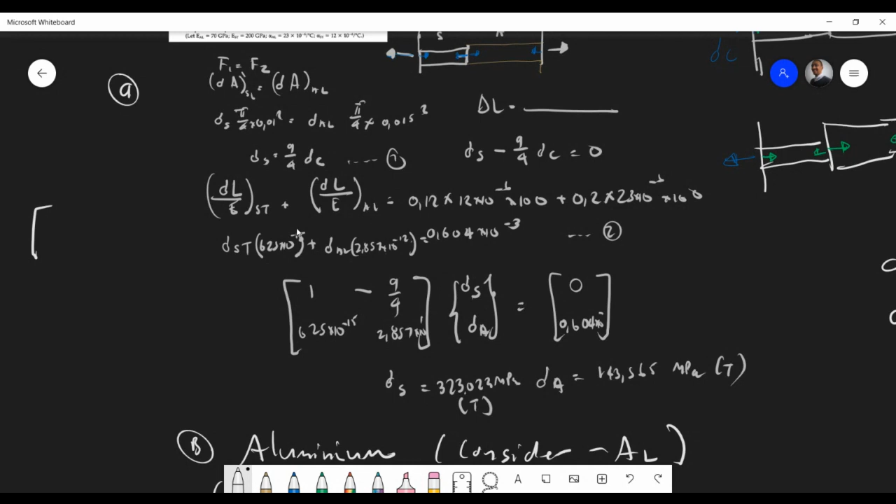So if you look at this, essentially what always when we're substituting, right, we actually have two equations, two unknowns. So obviously the two unknowns in this case would be the stress of steel and the stress of aluminium. That's the one equation when we do the static equation, the force equation. And when you come to the change in length or compatibility equation, we essentially end up with the same thing, right? So we have two unknowns, which is just going to be the stress in steel and stress in aluminium.

The reason why I encourage it, obviously, is because we make less mistakes by substitution. Some guys like the old way, but I prefer myself personally, which I just showed you. You can substitute, do not be faulted on that. You just set up two equations when you see two equations, two unknowns. Obviously, you can do exactly the same with three equations, three unknowns. So in this case, you're going to have your two forces equal to each other. You get that ratio.

Obviously, you're bringing the 9/4 onto the one side to get an equation equal to 0, because you want it to follow the same thing in terms of stress of steel minus stress of aluminium - it's exactly the stress in aluminium. So do exactly the same with your changing length or compatibility equation. You have that over there.

Boom. Now what I encourage, you're going to have to read me these values because I'm going to share my calculator. The reason I showed this is that I can potentially make problems more complicated like this, so you guys also have more modern and smarter ways of using linear algebra or matrices to solve problems.

Sasha, if you have this calculator, I did encourage you to buy it - mode, equation. Here you have your first one, 2x2 and 3x3. So I choose number 1, and I choose those coefficients. I think the first one is 1, stress of steel. The other one is minus... is it 9/4? Let's have a look here quickly. 9/4.

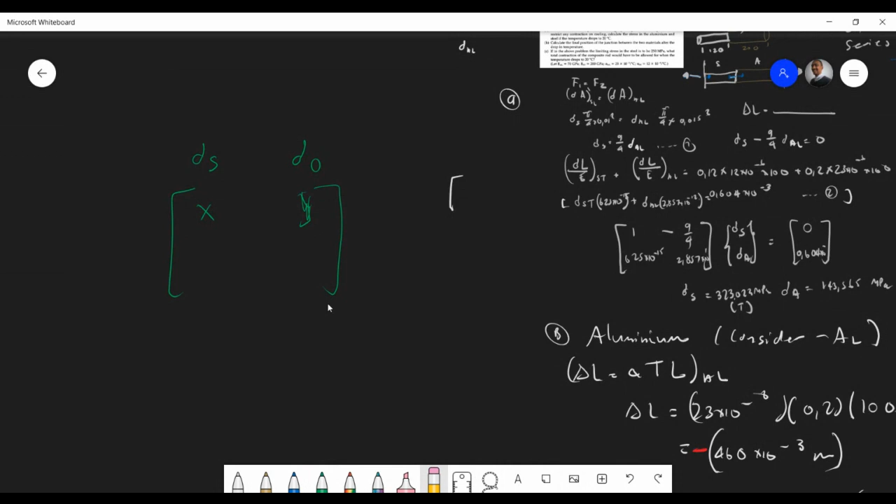You get it, Mr. Abril? Well, this is a question. Oh yes, thank you, I see. Thank you, yeah, that's all. It's really up to you, as long as you have it in the same order and the signs are all right. That's how it's going to work. But you can obviously just do your own way, it's not really a problem.